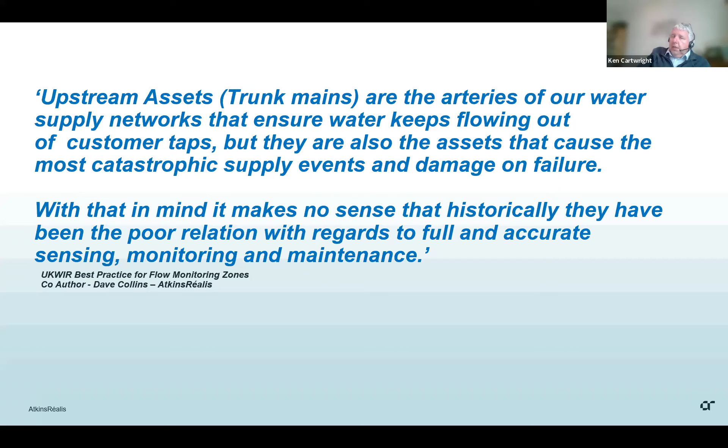I'm just going to leave this statement there for a bit for you to read. But fundamentally, it was something identified within the UKWIR study into best practice for flow monitoring zones. And that is, within the UK, we may have historically taken our eye off the ball when it comes to monitoring our most important assets supplying water to our customers and the level of non-revenue water across those assets.

Some of the slides, I'm going to give a brief overview of myself and my background, specifically with upstream and trunk main non-revenue water. For those international attendees, a brief overview of how networks in the UK are set up and how we report on non-revenue water. Then I'm going to go into the UKWIR study into best practice of upstream flow monitoring zones, what's changed since that report was issued, and some learning which could be taken on by non-UK water companies, and then a bit about what's next.

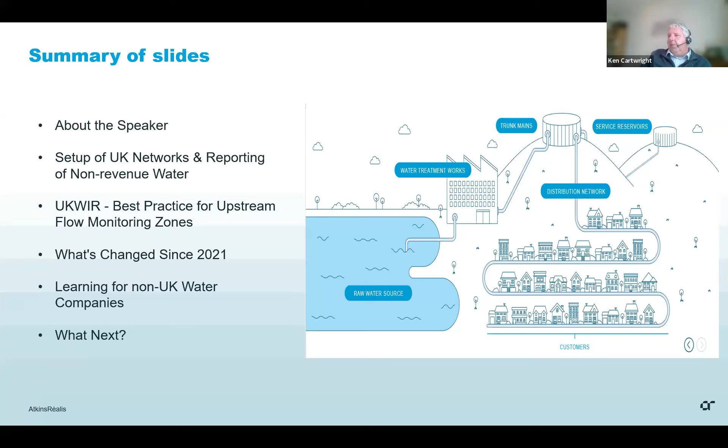So, I've worked in the water industry for 28 years, 25 of those have been with AtkinsRéalis. I'm a father of two over-energetic boys who like to spread germs, so I will apologise now - my voice may go, give me a couple of minutes, I'll try and get it back, but that's because of them. I'm also a head coach of an under-8s rugby team.

I've worked across many areas of the water industry, both within the UK and internationally, covering design, performance monitoring, reporting, solution development, and in recent years I was technical lead on the UKWIR study into best practice of flow monitoring zones, and I've joined the AtkinsRéalis Assurance team auditing UK water companies.

But what's my history with non-revenue water on large diameter mains? It initially started in 1998 when looking at the area of Bolton within United Utilities supply area.

From that project, it actually turned into a huge project covering the whole of the company, United Utilities area, with multiple consultants supplying information into that. I was tasked with looking after Stockport DMZ as well as a few others. Within Stockport, we managed to reduce upstream non-revenue water by 16 megalitres a day, and that included finding a 5 megalitre leak within a treatment works, which was actually being hidden by what we call a wandering zero on one of their water supply meters.

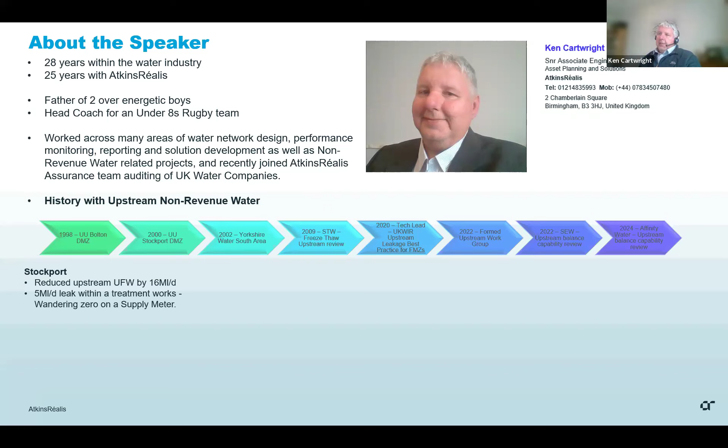A couple of years later, I ran a trial in Yorkshire Water looking at the south area of the company, and again we found some real issues - one of a reservoir overflowing 30 minutes twice a day, every day, and a large trunk main leak which was initially reported as being an unmetered flow used for sweetening flow between supply systems.

I have a big gap until 2009, where I helped Severn Trent Water during the Freeze Thaw event by balancing their upstream network. And again there's a big gap until 2020, where I became the technical lead on the UKWIR Upstream Leakage Best Practice for flow monitoring zones. Since then, we formed an Upstream Work Group, and I've also started to help a couple of companies understand where they are with their ability to complete upstream balances and what they need to do to move forward.

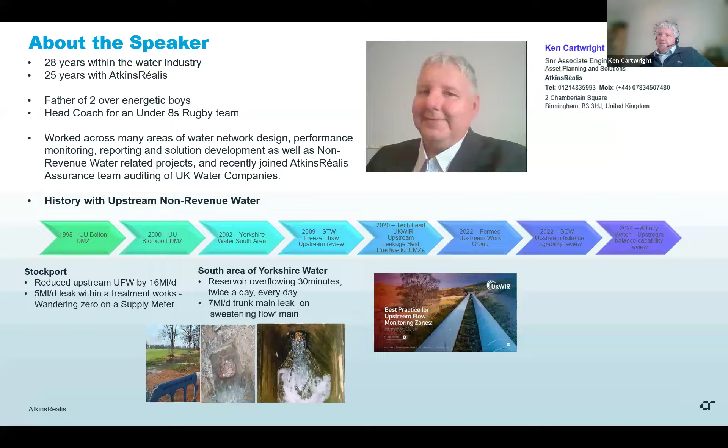So again, this is more for international attendees - how our network is set up within the UK, and how do we report on non-revenue water. The process for tackling non-revenue water in the UK was really set out in 1994 by the Managing Leakage Report.

Issued by WRC. In this, we split our areas up into DMAs, which is typically a discrete area with one inlet meter, and there could be cascading DMAs from that where the flows are also metered. They're isolated using boundary valves, and typically our mains are 2-inch to 8-inch in diameter, and those mains tend to have many property connections.

Just as this plan on the side shows, the shaded areas are what we call our DMAs, with the red mains being our trunk mains or our transmission mains, and the white squares are district meters.

DMAs cover approximately 90% of the UK network and are used every day for managing and targeting non-revenue water. The remaining 10% is formed by mains typically 8-inch in diameter or above, consisting of aqueducts, transmission mains, and pipework around reservoirs and water tower sites, which tend to have very few property connections. However, the UKWIR project identified small areas of distribution mains where a DMA hasn't been formed, and these mains are 2-inch to 8-inch with many property connections.

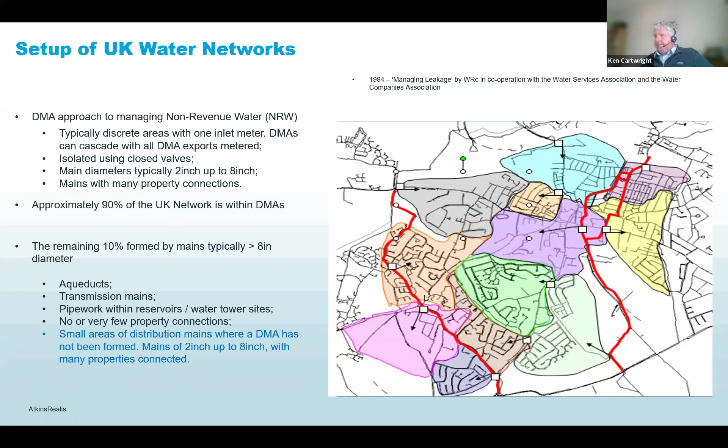So how do we report on non-revenue water within the UK? Within the managing leakage report, there's a system called the water balance. The first method of calculating non-revenue water is called top-down. We measure total water put into the company, then take off unmetered customer usage, metered customer usage, and other factors such as operational use, meter error, or illegal use. What we end up with is a top-down non-revenue water calculated number.

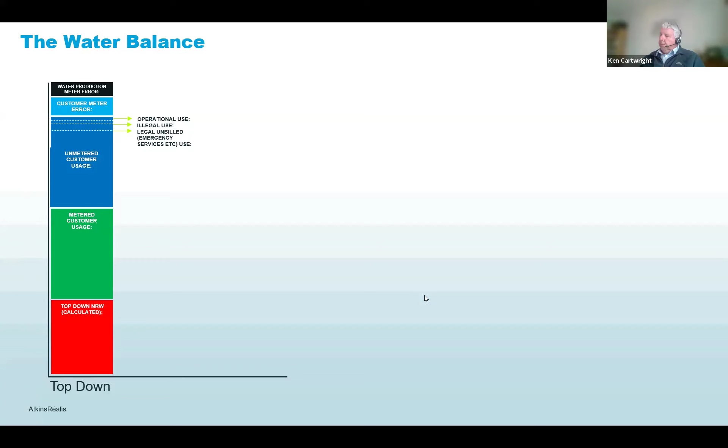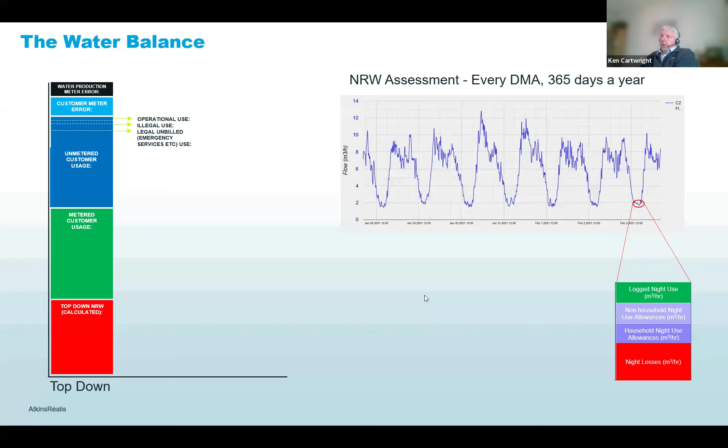We then take our DMAs, which cover 90% of our network, and every single day of the year we assess the minimum night flow for every DMA. From that, we take off allowances for commercial night use and household night use, and anything we log within that DMA. That gives us our night losses for every DMA, every day of the year. This is then multiplied by an hour-to-day factor, which is a ratio of the pressure at night against how that pressure changes throughout the day, giving us our total DMA non-revenue water.

This forms the first part of our bottom-up calculation. On top of that, we add our trunk main leakage and service reservoir leakage, which are generally estimated. Then we complete what's called an MLE assessment, or gap assessment, between what's calculated top-down and what's calculated bottom-up, and that gap tends to be shared across the two elements.

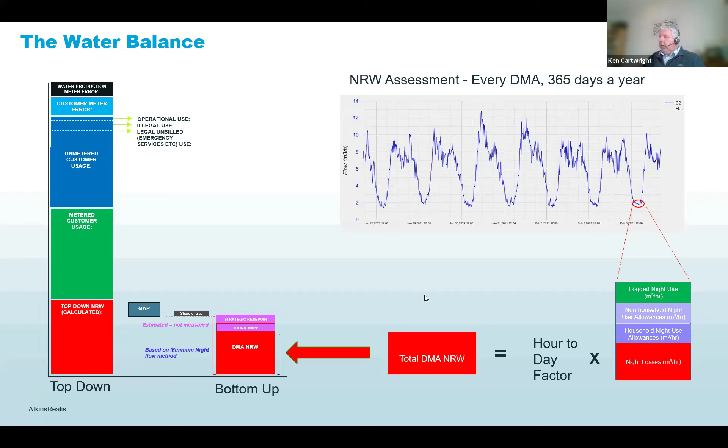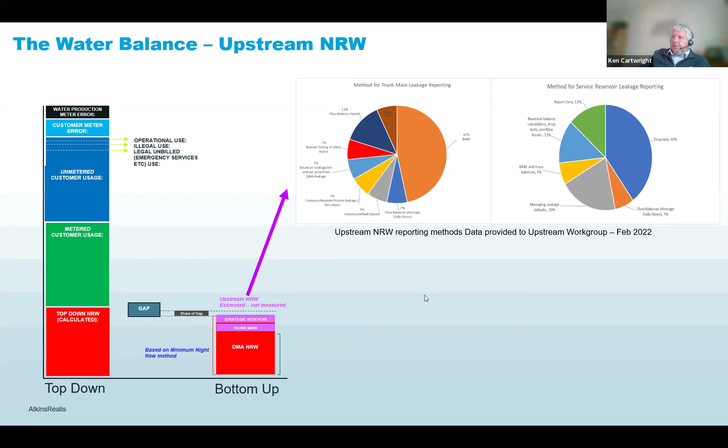Looking at strategic reservoir and trunk main leakage, a questionnaire sent out in February 2022 identified that most water companies in the UK use methods of estimation, not measurement. There are 8 different methods used for trunk main leakage and 6 methods for service reservoir leakage. The most prominent method is called BABE, or burst and background estimations, which started being used in the UK in 1994 to estimate levels of trunk main non-revenue water. It's a calculation based on length, size, material of mains, historic repair records, historic active leak detection performance, and a perception of condition and pressures across those assets.

At that time, only one company was actually using flow balances and measurement to calculate their upstream leakage, and two other companies were using some sort of hybrid approach.

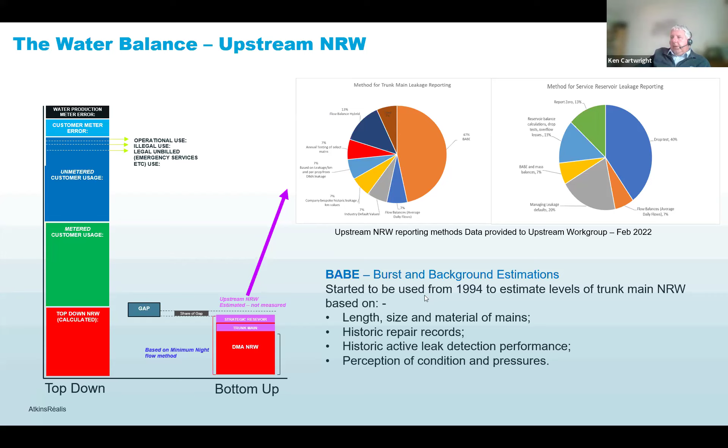I just want to say the approach of the UK using DMAs to reduce non-revenue water has been working. We've seen reported non-revenue water reduced from nearly 5,000 megalitres a day to 3,000 megalitres a day. However, that progress has slowed over the last few years, and with tougher targets to reduce non-revenue water by a further 50% by 2050, the industry needs to start looking at non-revenue water differently.

The PALM approach has been developed as a framework to understand how and why we manage non-revenue water, and where there are gaps in our processes and data, and where there's a need to innovate or improve how we do things.

However, as DMA non-revenue water is driven down, and the upstream non-revenue water is being estimated, and in most cases those estimates never change, the percentage of total non-revenue water reported on our upstream assets is increasing. Some companies are struggling to become compliant with the gap assessment in that top-down, bottom-up leakage calculation.

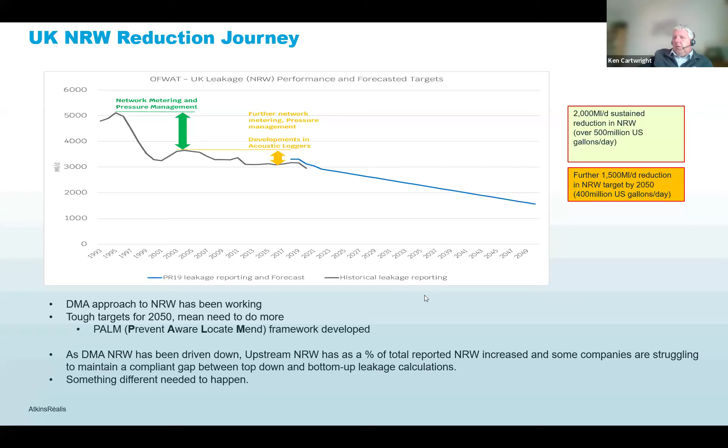Something different had to happen. However, that's not quite true. There's one company, United Utilities, who understood that there was actually a gap in how we were calculating things, and they needed to look at the total network, not just where DMAs were. They started a journey back in 1998 to look at a small area of Bolton.

By 2000, they'd mapped out the whole of their upstream network and started to complete balances across that network. Through the years, they've run many different ways of developing this, and in 2015, they moved away from BABE to actually using flow balances for reporting on upstream non-revenue water.

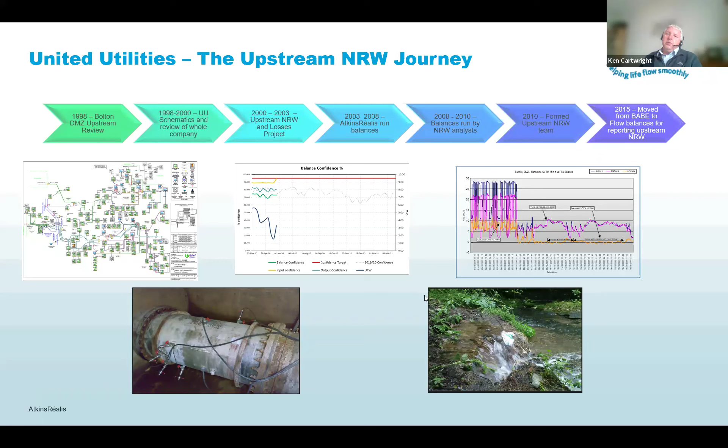This was the first in the industry, and when they presented on their process in 2018 at the UKWIR Annual Leakage Conference, it raised a lot of eyebrows, and that caused UKWIR to sanction the study into best practice for flow monitoring zones and trunk main non-revenue water.

So I'm just going to go into that overview of that study. In 2020, the UK's water research body commissioned AtkinsRéalis to complete a review of best practice for upstream flow monitoring zones. The report was issued in December 2021, and I've put a link onto this slide if anyone wants to go to the UKWIR website to purchase a copy of the study.

The study sets out best practice for setting up and utilising flow monitoring zones to monitor and report on non-revenue water. It also identified there was a gap in companies' ability to monitor upstream non-revenue water, and there were wider benefits to setting up UFMZs, including improving the ability to monitor network and operational incidents, improving network and operational awareness, providing evidence for further capital investment, and improving production planning.

The document also contains what we call steps to success. This is more for a company who have nothing in place, to understand what they need to do to go from basically a zero base, moving through the process until they can actually start to use flow balances for reporting on upstream leakage.

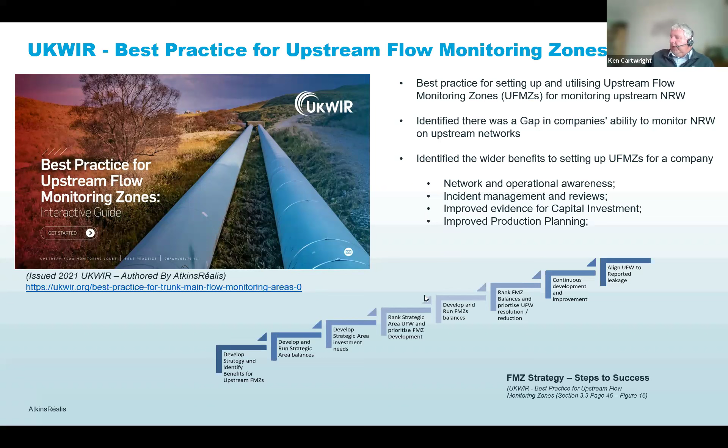Just going to go over what upstream flow monitoring zones, or UFMZs as we call them, are. There are also other names within the industry: trunk main area balances, tile analysis, or non-DMA balances. These are formed based on the ability to have all inlets and outlets of an area metered.

Any main downstream of a water into supply meter, and not included within the calculation used for DMA bottom-up leakage, can be utilised. They can be individual mains, a collection of mains, include water storage, or be a mix of trunk mains and water storage. In worst case scenarios, the balance is simply the water being measured into your network minus the water being measured into your DMAs.

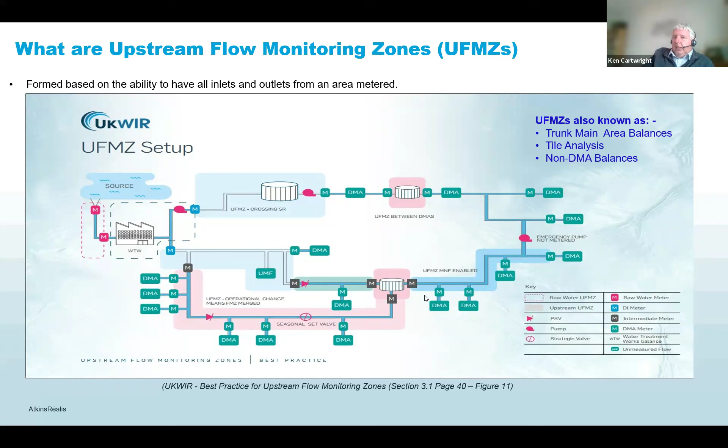What were the drivers for change for the study? Upstream assets, trunk mains, are the arteries of our water supply network, and they've also been forgotten parts of the network due to the lack of investment in sensing, monitoring and maintenance, due to the fact they have largely been designed out of a non-revenue water calculation by water companies.

This has given the option of estimating non-revenue water rather than using methods of measurement. Additionally, previous performance measures, such as interruption to supply, weren't as robust as they are now, and large bursts causing interruption of supply to customers weren't penalised.

That has changed in recent years, and actually customer minutes lost is highly scrutinised by the regulator, and this has meant an increased focus on our upstream assets and how they're performing. Supply-demand balances and water stress are also causing issues within the overall water balance calculation, and therefore estimates are becoming less resilient to assurance scrutiny.

When looking at that PALM approach which has been developed for our upstream networks - prevent - there's been a problem. We've had no tangible numbers, so you can't really come up with a justifiable benefit, and even if you do invest, you can't really measure that benefit.

Awareness - we remain reactive to problems on our strategic networks and not proactive, again due to limited investment in accurate sensing, monitoring and the maintenance of those assets.

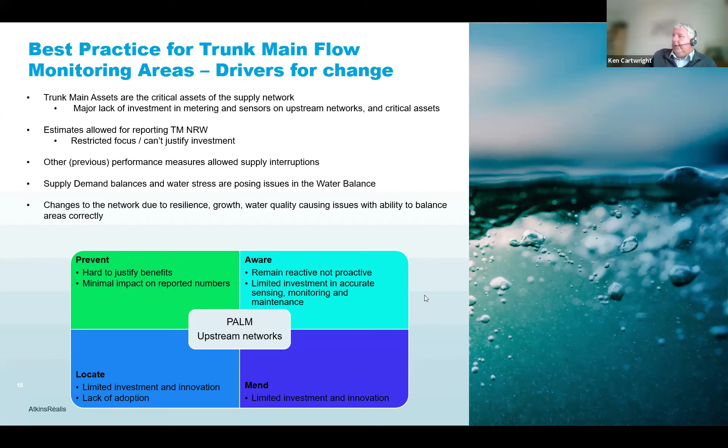Ken, Michael here. We've got some problems with static on the line. We can make out what you're saying, but it's not crisp and clear. Is it possible to see if we can do it without the microphone, or is that essential at your end? Is it worse? Okay, we can work out what you're saying, it's not as crisp as it could be.

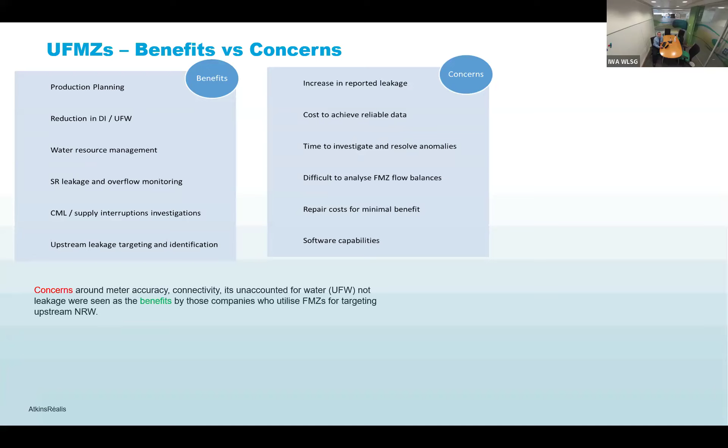No problem, you are right, that is definitely worse. Is that better now? Oh, now that sounds better. Let's go and we'll see how it goes. Sorry, it might also be my throat's getting croaky.

All right, just going to benefits and concerns. There's a number of benefits and concerns identified by the steering group with the UKWIR project. One interesting thing was a number of companies raised concerns about meter accuracy, connectivity, and unaccounted for water - it's not leakage or non-revenue water. However, a number of companies saw those as benefits by using UFMZs, and this sort of showed up.

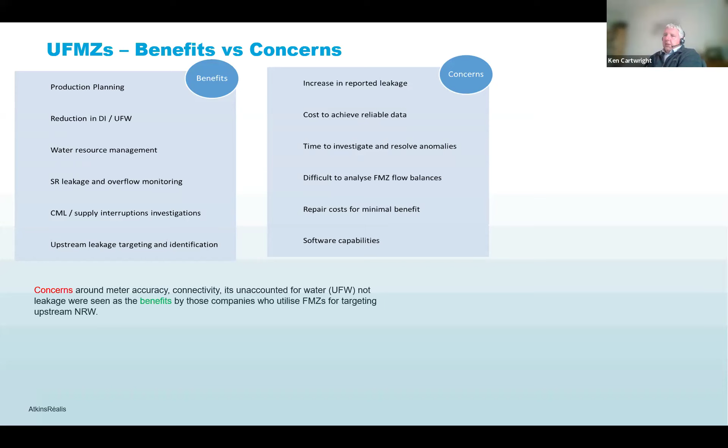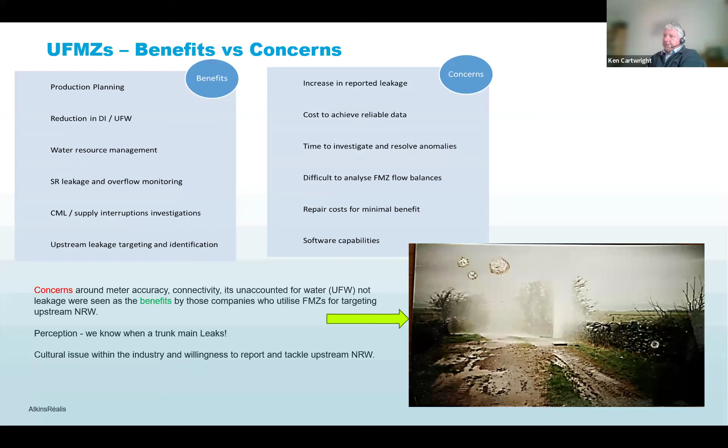A key statement which came out during the study was actually, as companies, we have an ethical duty to improve our accounting of every drop of water we extract from the environment and our understanding of how that water transfers around our networks before reaching our customers.

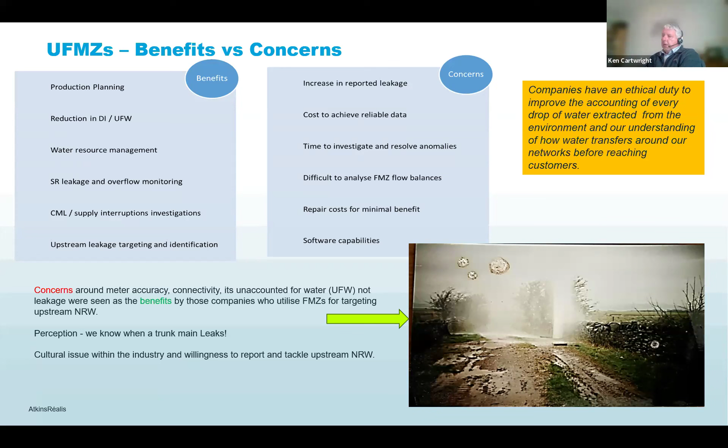Something the study also identified is in developing upstream flow monitoring zones, it's an iterative process. Initially confidence is low, but as you start to develop them, you get a better understanding of where there's lack of monitoring at a strategic and local level, where non-revenue water is being calculated, whether that's positive or negative, and the issues around how that number is being produced. That only enables a company to make further improvements and evidence investment need.

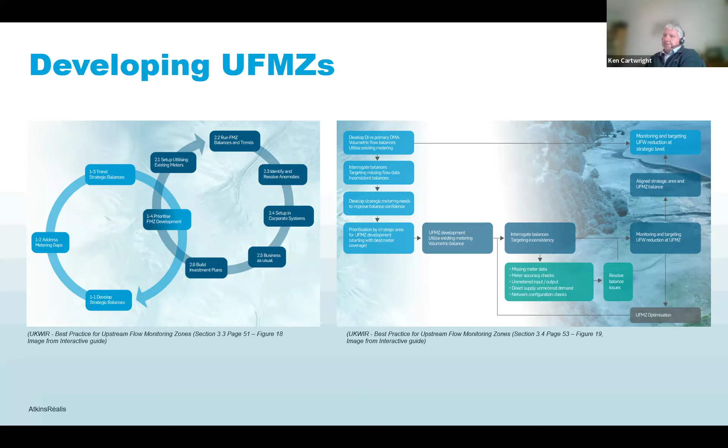Key learning, so trending balances. In the UK, we love our 15-minute flow profiles for our DMAs. These are normally diurnal in pattern with low flows at night and morning and evening peaks. The whole of the minimum night flow analysis calculation for non-revenue water is based around this flow pattern for DMAs.

In some instances on our trunk main networks, we can still get those patterns where the net of the inlet meters minus the net of the outlet meters provide a similar diurnal pattern. However, due to pumping regimes, changes in storage and reservoirs, operational changes of the network, the 15-minute profiles are often variable. You don't have a minimum night flow during the night period, and they're inconsistent and sometimes fluctuate from positive and negative across the day.

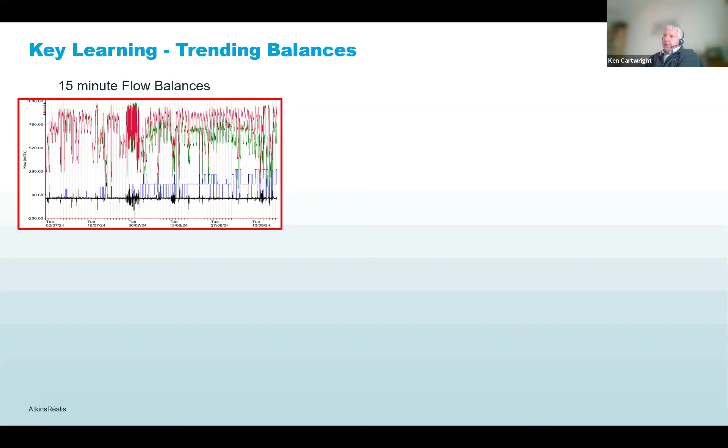Therefore, the DMA approach for calculating non-revenue water wasn't applicable. What United Utilities did, and what was set out in the best practice, is you could still take those 15-minute flow balances, even with all the noise which occurs on matching lots of meters against each other, and by converting that into daily average weekly flows, you're basically doing a volumetric balance of the water into an area versus the water out. If that's zero, you know you don't have a problem.

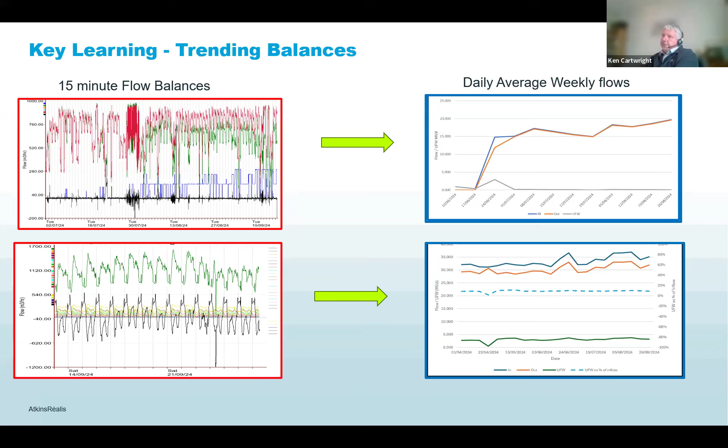What it also shows in areas where the 15-minute balance could be bouncing from positive to negative is volumetrically you can start to see that there's actually a problem in the area, and the key thing is about the consistency of that value. We can use these to actually identify non-revenue water.

For instance, this is one where we saw a large increase on a weekly balance within an area. On further look, we identified that a service reservoir had been overflowing for a couple of days. The thing about this, the reservoir was overflowing at 84% capacity, so no alarms were being set off. If we applied that factor back across previous months, we could actually pick up that these pickups here were also cases where the reservoir was overflowing, but for shorter durations.

We can also identify trunk main leaks and see them grow. Although the weekly balance could be slightly erratic, what we can see on the 15-minute data is there's a large leak, we fix it, and then the leak starts to grow over time. The 15-minute balance is very erratic, but on the volumetric balances, you can still see that occurring.

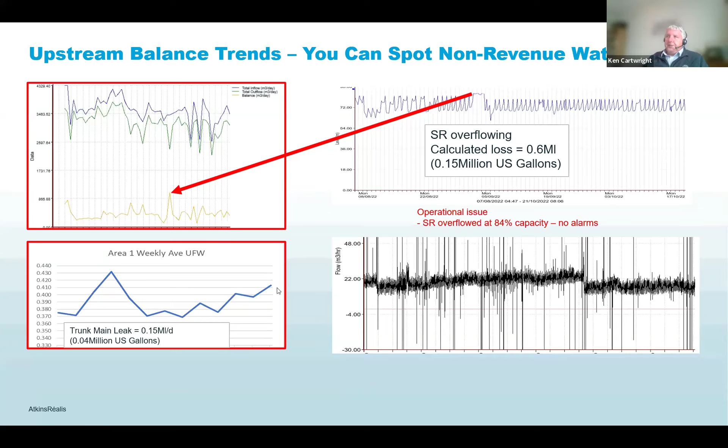Meters and telemetry were raised as a major concern, and there's reasons for that. We get things called zero errors or fixed offset. These are typically meters which still record a flow going through the meter, even though there is no actual flow.

We often see this problem on pump meters, so when the pumps are off, the meter still records a flow.

There's full-scale deflection issues, where the flow actually going through the meter is higher than the meter is allowed to record. What we see is a flatlining of the top flow, and then the meter starts to have problems and drop out.

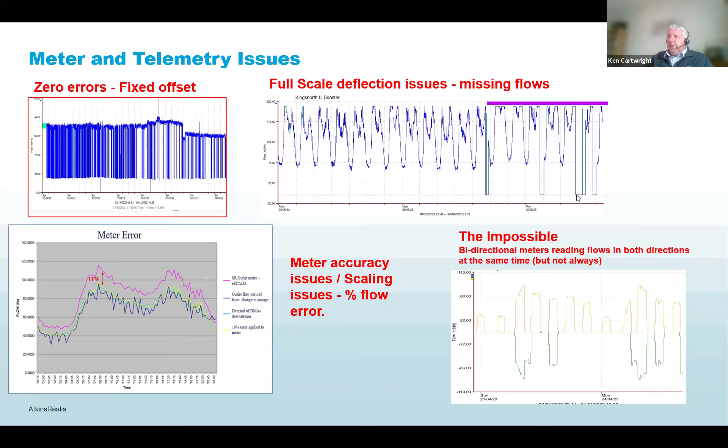We have meter accuracy issues, or a percentage flow error, meaning the higher the flow rate through the meter, the bigger the error. We also get impossible issues, such as a bidirectional meter reading flows in both directions at the same time, but it doesn't always do it, so we don't really know what's going on there.

When looking at connectivity issues, unmetered connections and operational changes, flow balances can be quite erratic at times. But by trending the data and comparing it with neighbouring systems, you can see that an increase in one balance can often be offset by a decrease in another. So we know there's an unmetered connection between those two systems, and we can start to estimate how much flow is passing.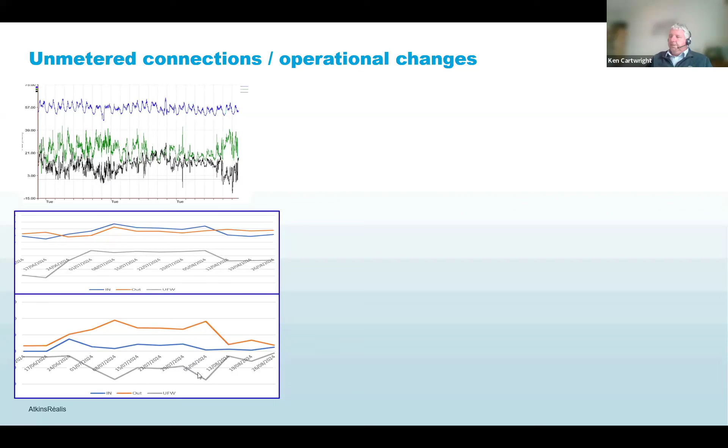In some cases, you can even start to put a real flow value onto that connection and see when and how often operations are changing the settings.

Other things we might pick up on: unmetered process water being taken back into treatment works downstream of DI meters is sometimes a problem within the UK. Recently we found a megalitre a day being used for a backwash where the connection is taken directly downstream of the distribution input meter.

We found flows passing between zones where we've been told it's hydraulically impossible based on modelling, or it's simply not allowed due to water quality issues. And we found resilience or emergency connections which are actually passing water on a daily basis instead of only when they're needed.

We've identified large users and demand outside of DMAs, and predominantly our DMAs have issues. They are often fed off our trunk main system, and that causes imbalances in our areas.

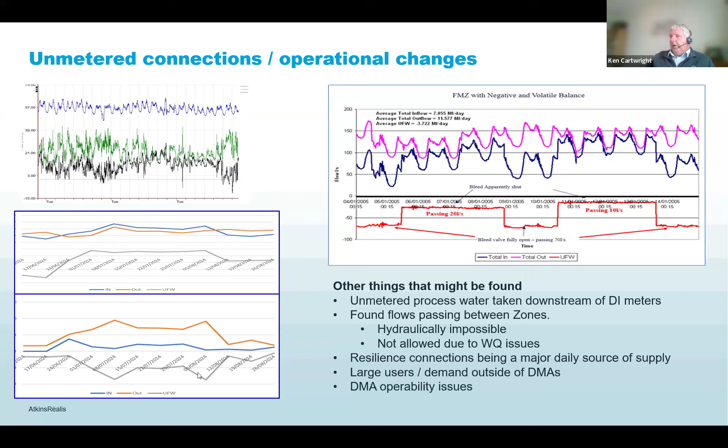They've enabled us to improve our understanding of just how flow dissipates across our network and where imbalances exist, where our data confidence is high or low, and where that confidence in non-revenue water is high or low.

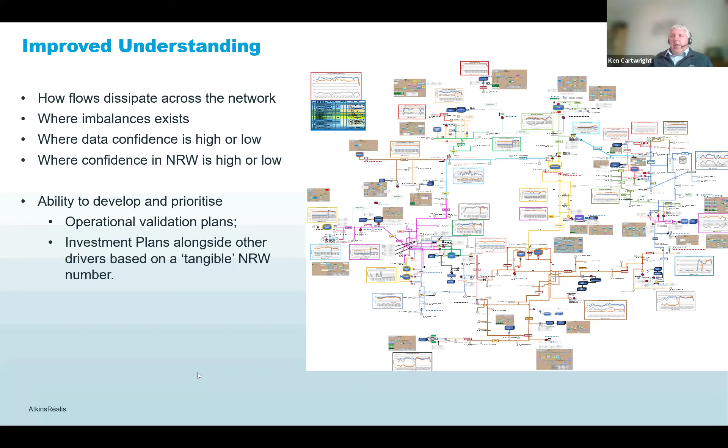Setting that out and developing that plan enables us to prioritise where we need additional investment and where we need operational validation. The best thing about it is we have a tangible number, which can vary day by day, but that provides evidence and need for investment.

Taking it to a bit of a simple process, what do we actually mean? We're measuring the total water going into our network. In some cases, we may have water leaving our company and exporting to other companies. We then look at our DMA flows.

Within the UK, we have assessments called operability, which is our confidence in the level of non-revenue water being reported in that area. What we're actually saying is if we have a higher level of confidence in those DMAs and the level of non-revenue water being reported, then we should have confidence that those meters are actually reporting the correct amount of flow into that area.

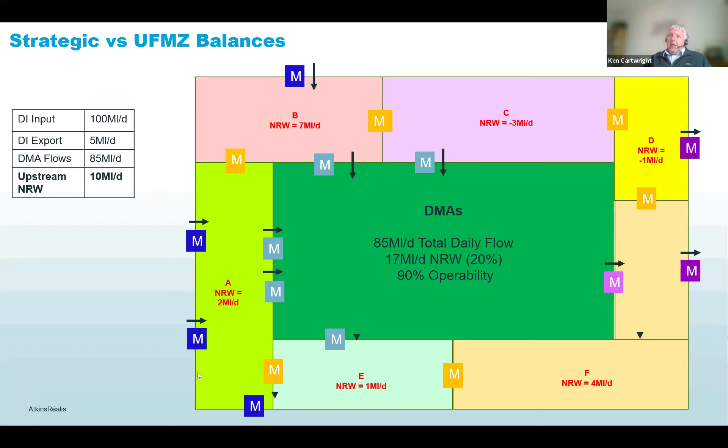So the gap between our DI and our DMA flow is basically our upstream non-revenue water. You can then split that down further using existing meters to aggregate that non-revenue water up. Sometimes you get high positives, sometimes negatives, but fundamentally, if the number in the aggregated calculation equals the total number in our strategic balance, then we have confidence that that's the level of non-revenue water.

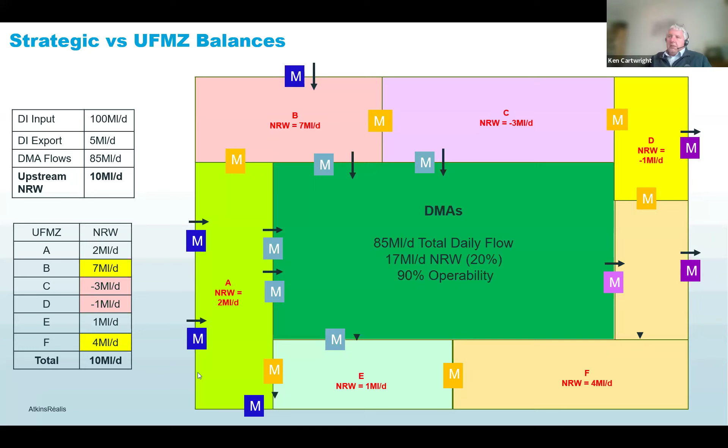Our next task is to work out why some balances are negative and why some are high, and resolve those issues.

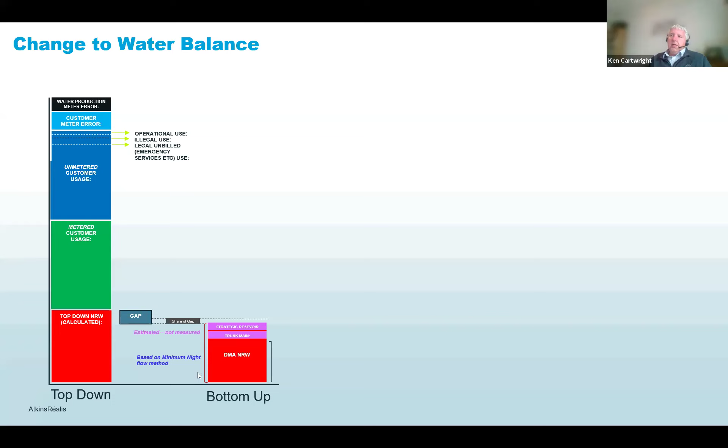Taking that back to how we report on leakage and non-revenue water to our regulator, we're adding an extra step. We're taking our total water into our network from our top-down balance, then taking our total water into our DMAs, and that gives us an unvalidated upstream unaccounted-for water.

We then need to understand more about the demand of that upstream network and infill any missing DMA flow data or problems caused by DMA operability. That leaves us with our validated, measured upstream unaccounted-for water, which in the end will replace the estimated methods used to date.

The problem this will do is it's likely going to cause an increase in reported non-revenue water, but it also might reduce our MLE gap and enable companies to have higher confidence in the total number reported. It also may cause potential challenges to other components of that water balance process.

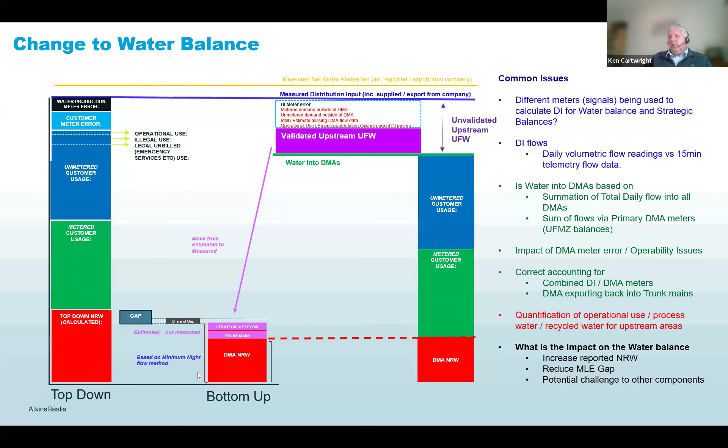Actionable insight - so what are we actually seeing from these? We can validate our DI meters. We have confidence in those meters that we're reporting the right level of water in, or if not, we can get those meters replaced.

System integration. The upstream flow monitoring zones are now being integrated into companies' GIS systems and aligned with other driver hierarchies. That's providing improvements to network models. It's allowing improvements to contingency planning and management and supporting investment into smart networks.

We can spot reservoirs overflowing, even if it's only short periods during the day. We can spot operational changes. We've got the ability to assess our confidence in balances and identify when that confidence changes week by week, and we can find leakage.

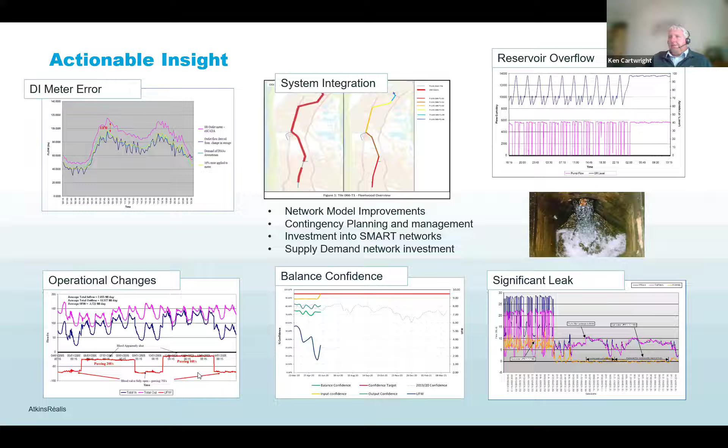So what's changed since 2021 on the issue of the report? As I said before, following the report, Atkins were approached by a couple of water companies within the UK to set up an upstream work group. This is a free group and it's Atkins' investment to the industry.

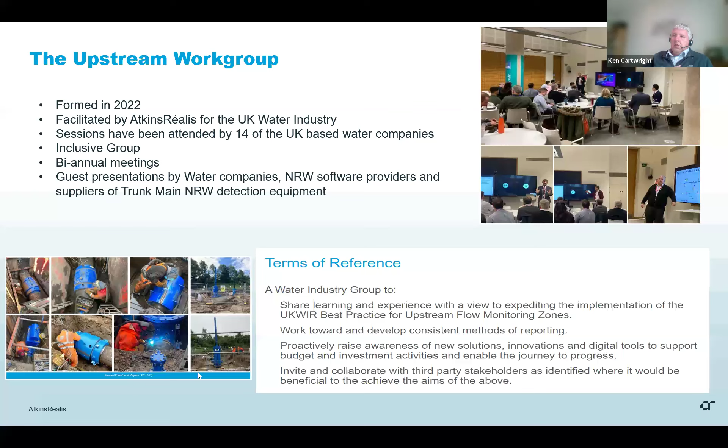The sessions have been attended by 14 of the UK water-based companies, and we meet biannually. We've had guest presenters from water companies, non-revenue water software providers, and our next session is bringing in some suppliers of large diameter leak detection equipment.

What else? So one company have set up an upstream non-revenue team, and in 2022 they moved to a hybrid form of reporting on upstream leakage, where 25% of the company was being based on upstream flow monitoring zones. They had a target to move the whole company and the remaining 75% to using flow balances by April 2025.

Two other companies have set up dedicated trunk main non-revenue teams. One company has switched to using flow balances following a review by our regulator Ofwat, and other companies are trying to develop a better understanding of the gap in their ability to report and use upstream flow monitoring zones.

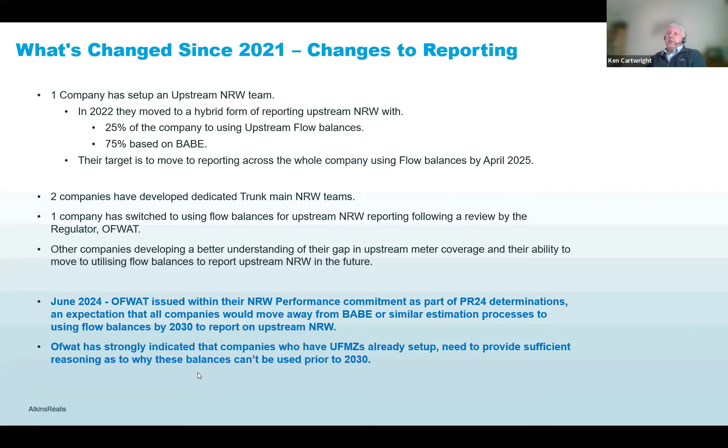Most importantly, in June 2024, the UK regulator Ofwat issued within their leakage performance commitment as part of the PR24 determinations and expectations that all companies would move away from BABE or similar estimated processes to using flow balances by 2030. And they also strongly indicated that companies had that functionality already. They needed to provide sufficient reasoning as to why they couldn't move to using flow balances instead of the current estimation method prior to 2030.

Just going into learning for non-UK water companies. So I do realise that a number of areas across the world don't use DMAs as a method of controlling non-revenue water. But there is still this ethical responsibility to understand how water extracted from the environment transfers across our network.

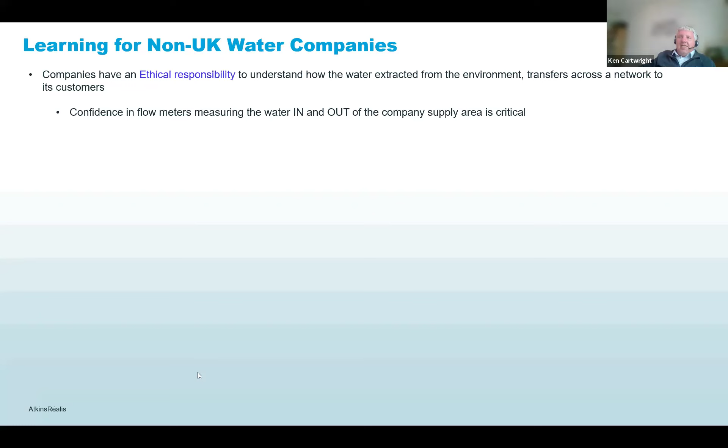You need to gain your confidence in your key meters putting water into your network or exporting water out of your network. Fundamentally, any equation into non-revenue water is governed by the flows and accuracy of those meters. You need to be able to aggregate that value across your network based on actual measurement and not assumptions.

Developing UFMZs enables companies to truly understand how water transfers across the network. The other thing is you're actually producing a real measured number, and that means it supports investment need for further improvements in monitoring and maintenance. It can be linked to other drivers to maximise the benefit.

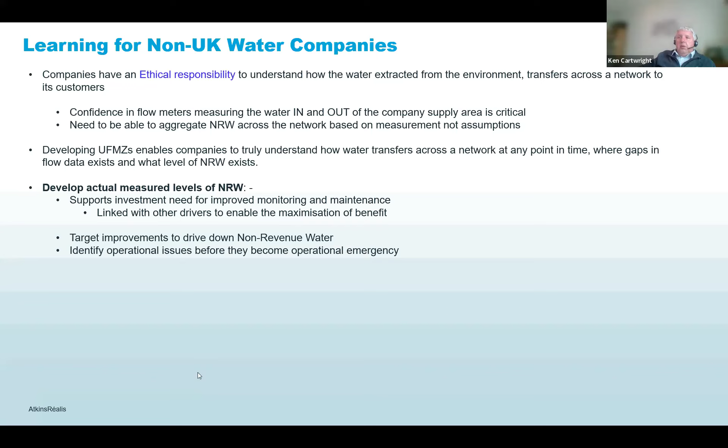You can target improvements and drive down actual non-revenue water instead of an estimated number. You can identify operational issues before they become operational emergencies, such as spotting leaks before they become bursts and cause interruptions to supply. You can improve network model accuracy.

And that's quite critical in this day and age because models are used more and more to understand operational maintenance planning, production planning, understand the impact of operational changes, whether planned or unplanned, improve the supply-demand balance accuracy, particularly when looking at source reduction planning, or emergency response to source output, outage or water quality issues.

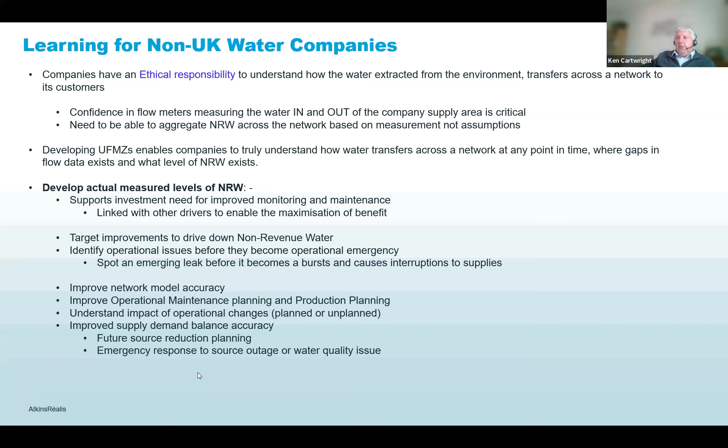Treat your balance areas as assets. It's probably taken a while within the UK for DMAs to not just be seen as being used for non-revenue water. They're now widely used for water quality reporting, customer complaints, performance analysis. And that's really what we're saying about your balance area.

They need to be treated as an asset, and you need to align your non-revenue water drivers and hierarchies with other drivers as well. You need to develop balances on existing meters and understand where there are gaps, where there's need for additional metering. Focus on your strategic balance first, so your water into your company and your water out, then look at splitting that up into sub-zones or super zones. And then if you really want to go down the route of TMAs and DMAs, then it's worth doing that. The key thing is by focusing at the higher level and then breaking it down, you'll start to understand where those programs of DMA implementation may be worth targeting first.

Develop asset standards to maintain balance integrity. A common issue within the UK, especially over the last few years, is as we've been investing in our network due to growth and changes in our supply ability, resilience connections have been put in place, and these often have been installed without meters, therefore breaching our ability to complete balances.

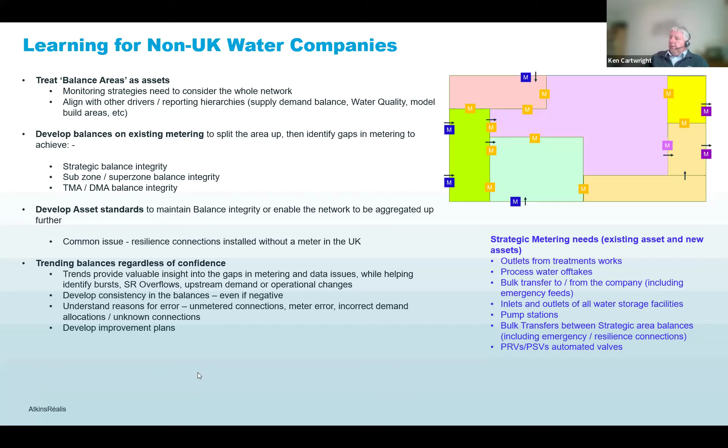Trending data is key, regardless of confidence. As you get more used to those trends, you can start to develop consistency in those balances, even if negative, and the changes in that consistency can highlight problems you wouldn't normally look for. Understand the reasoning for errors, and then develop improvement plans on how you can make those balances even more confident.

So what's next? Within the UK at the moment, companies are looking at or setting up flow monitoring zones and starting to understand where they have gaps in their strategic metering or meters across the network. They're looking to incorporate flow balances into their corporate systems and their reporting hierarchies and align it with other drivers.

When we look at non-revenue water software use within the UK, the two main suppliers have the function to set up and monitor upstream flow monitoring zones within those software systems. But what's been identified is effectively when it comes to automating the infilling of missing data or applying factors, we have to take that data out and apply that externally to the system. We need to incorporate change in storage within the calculation, and we also need to improve the ability to understand when a UFW or non-revenue water profile is produced.

Is that demand? Is that leakage or non-revenue water? Is it meter error or connectivity? Flow meters - there really needs to be improvement in accuracy and reliability in flow meters, and we need to find ways of reducing costs with no risk to accuracy.

The costliest part of installing the meter is digging the hole and building the chamber on big pipes. And then in some cases where you need to break into that pipe, there's a huge risk to actually resupply the network while that work is going on. It'd be great if someone could come up with something very simple - you could just dig a small hole, attach a small thing to a pipe, and it would measure the flow accurately.

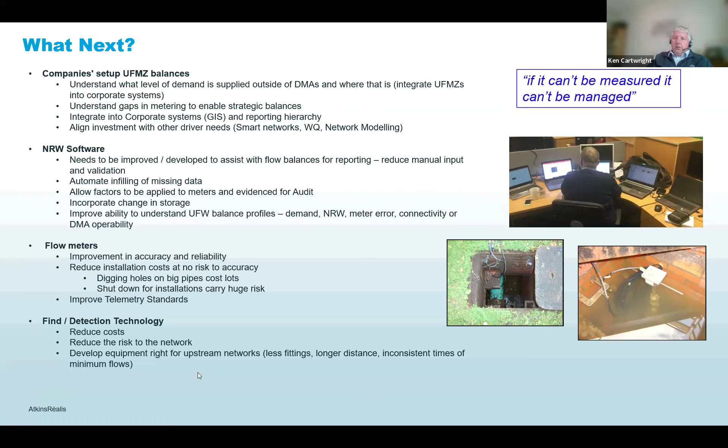Predominantly, the bulk of technology used to detect leaks on large diameter mains has been transferred from our DMA methods. And actually, we need to improve that because we have fewer fittings, we have longer distances to cover, and minimum flows aren't happening at exactly the same time. So you need something we can react with to how flows are actually changing on this network.

Before I go to questions, I'm going to take you back to a fact I introduced about the rugby team. I often get asked by parents of the players, my company CEOs, my stakeholders, why we don't just focus on our better players and continue to play children with less ability. My reply is simple: we take a one team approach regardless of ability. But if we don't focus our efforts on the lesser ability players, or those players where the amount of effort you put in doesn't necessarily provide instant benefit, in future years we could find ourselves without enough players of high enough quality to form a team.

This is basically an issue I see we have in the UK with our upstream networks. We've focused our effort on our star players, our DMAs - all of our investment, all of our innovation has gone into finding non-revenue water in those areas. And we've forgotten about our upstream areas, which means now we have a harder job to bring those areas up to standard.